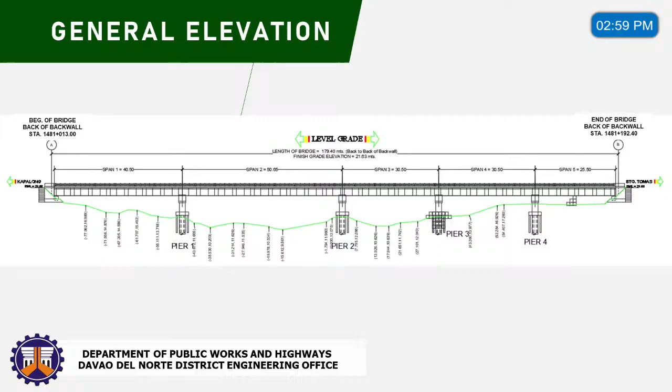To Station 1481 plus 192.4 at Station B. Next slide, please. This is the general plan for the bridge, which has 5 spans. Next slide, please. General elevation of the bridge.

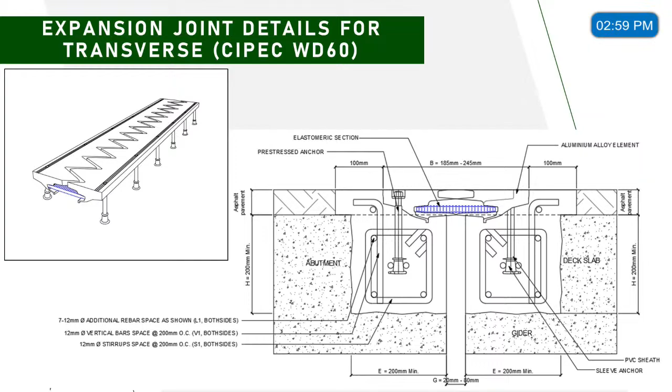So for the replacement of transverse expansion joint, it is located at abutment A and abutment B. As you can see in the geotag photos, these are the damaged expansion joints to be replaced. Next slide, please. For the transverse expansion joint, we will be using finger type expansion joint. These are the details for the expansion joint.

Next. For the replacement of longitudinal expansion joint, the highlighted area is the expansion joint to be replaced. As you can see for the upper part, it was shortened to 41 meters; not the full length of the bridge will be replaced. Next slide, please.

For the longitudinal expansion joint, we will be using compression seal type. This is the details for the expansion joint. The specification is CIPEC WOSD 50. Next slide, please. So these are the longitudinal expansion joints to be replaced. Next slide, please.

Next, the partial deck and slab replacement at span number 3 and span number 4. The highlighted area is the location of the deck slab to be replaced. These are the photos underneath the bridge showing the damaged slab.

Next, the removal and replacement of asphalt overlay for the entire length of the bridge, including approaches. This is the typical section for the asphalt overlay. This is the photo of the bridge deck to be replaced with asphalt.

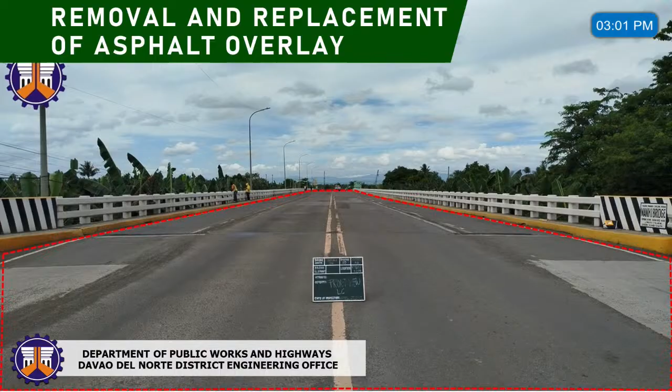Next, application of epoxy injection at Pier 1 and Pier 3. This is the location of the cracks at the pier. As you can see in the geotag photos, the highlighted areas are the cracks to be injected with epoxy.

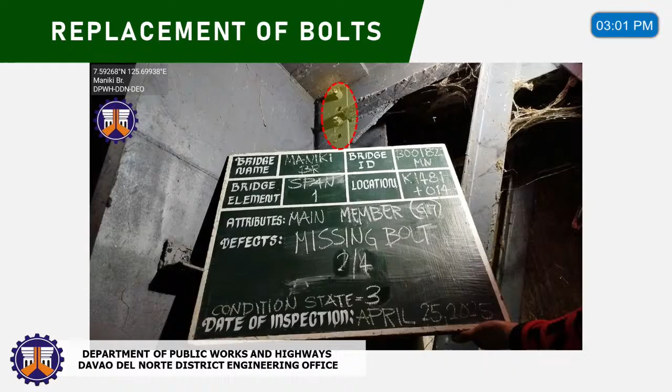Next is the replacement of bolts. These are the photos of the missing bolts underneath the bridge. This is one of the missing bolts, and this is another one.

And that's all for contract ID 26LC0002. Thank you.

Board members, any query regarding the presentation? Query, Mr. Chair, okay.

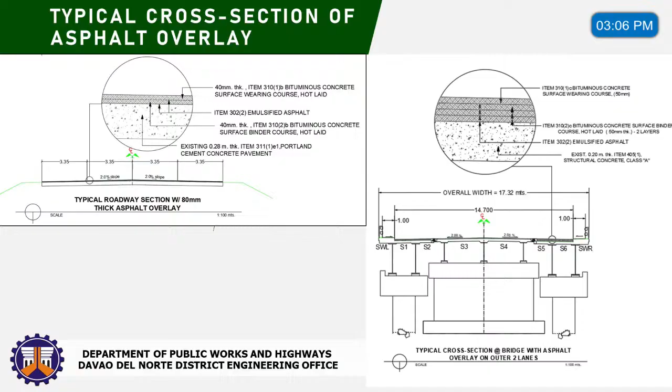Any query regarding the presentation? None, Mr. Chair. The implementing unit? None, Mr. Chair. So thank you, let's proceed to the next project.

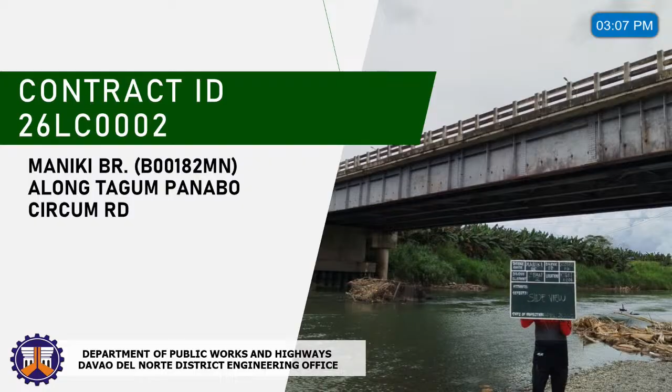Good afternoon, Mr. Chair, good afternoon everyone. For Project Junction, Tagum City Bypass Road, San Agustin-New, Bohol, New Corella, leading to Matin-ao Inland Resort, New Corella, Station 1+091 to Station 1+189, Davao del Norte.

Net length is 98 linear meters. Total width of road is 6.7 meters. Shoulder width is 1.5 meters and thickness of pavement is 230 millimeters.

Scope of works: road concreting, construction of grouted riprap slope protection, application of reflectorized thermoplastic pavement markings, installation of guardrails, and gravel transition ramp.

Summary of quantities, location map, the typical section at normal crown fill section, and geotag photos. End of presentation.

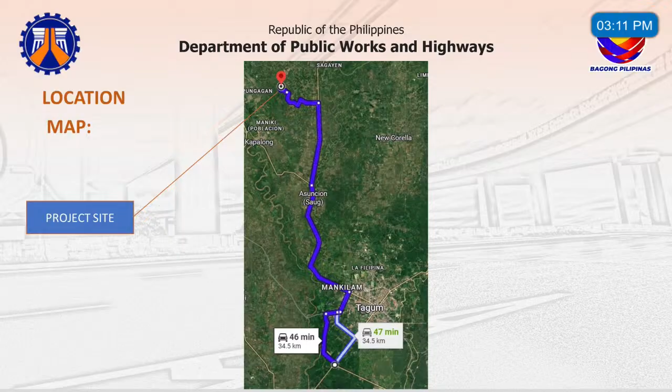Then this is the location of the project site from our office, with a distance of 34.5 kilometers. Geotag photos. As you can see, the trees like banana trees and coconut trees will be removed. Site validation was conducted on September 23, 2025.

Then the site development plan. Then the truss details, we have 50 by 50 by 5 for the main frame and web member, double angle.

Then proof of ownership, sir. Tax declaration pa ang mahatag namo, sir, kay gina-process pa po ang proof of ownership. Then nag-send na po mi og letter for proof of ownership. Na-receive na nila pero wala gyapon sila mo-respond. Nag-wait pa mi sa ilang respond, pero gina-follow up na namo karon.

So minimum equipment requirement, we have backhoe, bar bender, bar cutter, cutting outfit, dump truck, one bagger mixer, plate compactor, boom truck, and welding machine.

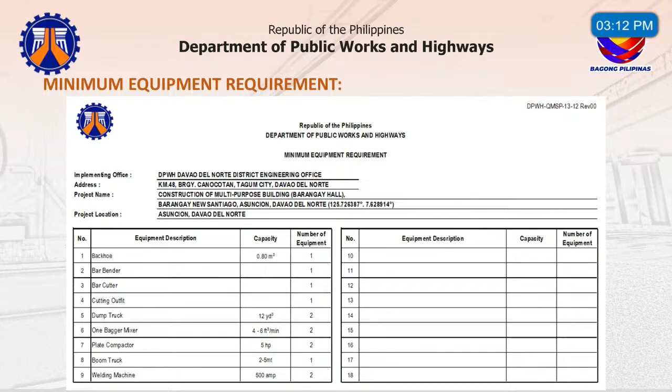Then here are the summary of quantities. For part A, we have field office for the engineer. For part B, we have permits and clearances, project billboard and signboard, occupational safety and health, mobilization and demobilization. For part C, we have earthwork, seedlings and saplings for other programs and initiatives, individual removal of trees, structure excavation, embankment from roadway, structure excavation, and gravel fill.

For part D, we have structural concrete, 3,000 PSI and 4,000 PSI, reinforcing steel deform grade 40 and grade 60, and form works and false works.

For part E, we have soil poisoning as well. For the masonry works, we have CHB 100 mm and 150 mm.

So part E, finishing works, we have wall for 4.5 mm fiber cement on metal frame, wall WPC, carpentry and joinery works for PVC panels, glazed tiles and trims, unglazed tiles, floor finishes, cement plaster finish, and railing. For the painting works, we have masonry and concrete, wood and steel.

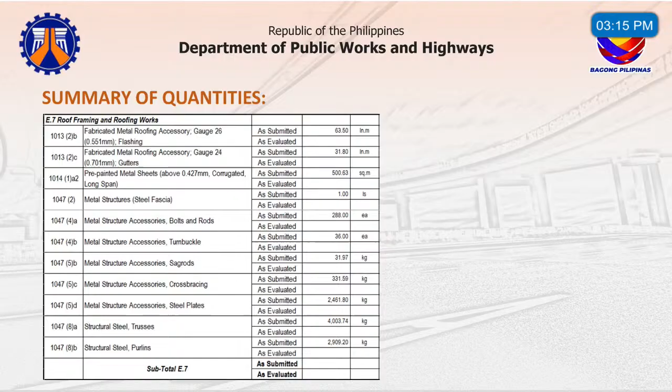So for plumbing, we have sewer line works, storm drainage and downspout, septic vault, plumbing fixtures, and cold water lines. For the electrical works, we have conduits, boxes and fittings, wires and wiring devices, panel board with main and branch breakers, solar panel, and lighting fixtures. And lastly, mechanical works, we have ventilating equipment, air conditioning system, stainless water tank, and fire alarm system.

That's all po, sir, thank you. Thank you. So board members, any query regarding the presentation? Query lang, Mr. Chair. Okay, proceed.

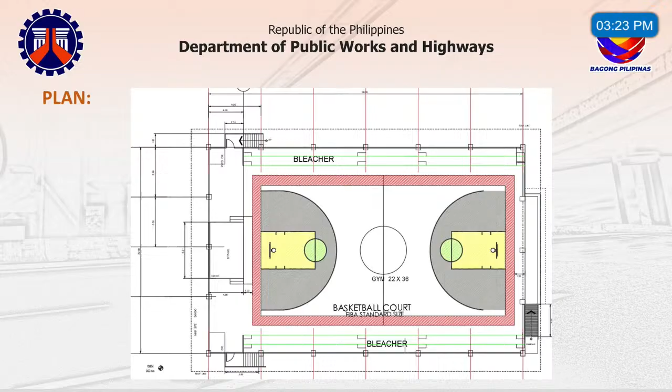This is our perspective, so this is a gym. The building is 36 by 22, so wide flange is what we used for the gym in this project.

As per the site development plan, we have existing structures here: a water tank, tanod post, existing stage, and a daycare center, plus the gym. These mentioned structures will be removed to make way for the gym.

There will also be construction of 35 linear meters of 6.5 meter width concrete road. As you can see, the proposed gym is marked with a red line.

This is our site development plan in 3D. So our gym is here, positioned perpendicular to the main road.

This is our elevation. The elevation is aligned with the main road.

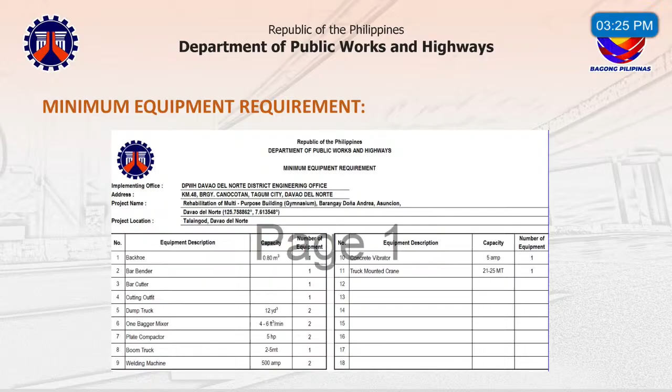This is the minimum equipment requirement.

For the site validation, dated September 23, 2025, you can see it was signed by the Barangay Kagawad.

For the proof of ownership, they have a transfer certificate of title named to Barangay Doña Andrea, Municipality of Asuncion.

For the demolition permit, they have secured the permits for the removal of the existing structures. Here are the demolition permits.

This is the existing site. The gym here will be removed. The blue structure on the left side is the tanod post and water tank, which will also be removed. The stage, though not visible here, is on the right side portion near the gym.

On the right side portion, this will be removed along with the adjacent building, which is the daycare center, which will also be removed.

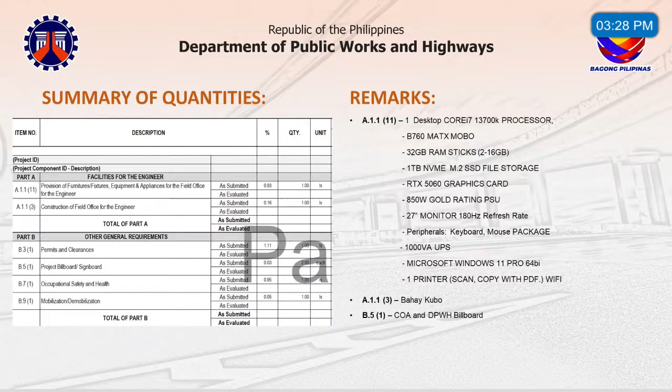For Part B, we have other general requirements: permits and clearances, project billboard and signboard, occupational safety and health, mobilization, demobilization, subgrade preparation for the road, aggregate sub-base course for the road, and removal of existing structures, along with structure excavation and embankment from roadway and borrow, and gravel fill.

For the reinforced concrete, we have structural concrete Class A and B, 4,000 PSI and 3,000 PSI, and reinforced steel grade 40 and grade 60. For the pavement road, we have PCC pavement unreinforced 230mm thick, plus formworks and falseworks. Then for finishing, sanitary, and other civil works, we have CHB non-load bearing.

Non-load bearing CHB 100mm and 150mm. We have carpentry and joinery works, PVC ceiling panels on metal frame. We also have stadium seats, which are plastic seats. Then glazed tiles and trim, unglazed tiles, floor finishes, tactile tiles for the ramp. We also have cement plaster finish, aluminum cladding, railings, then painting works for masonry, wood and steel.

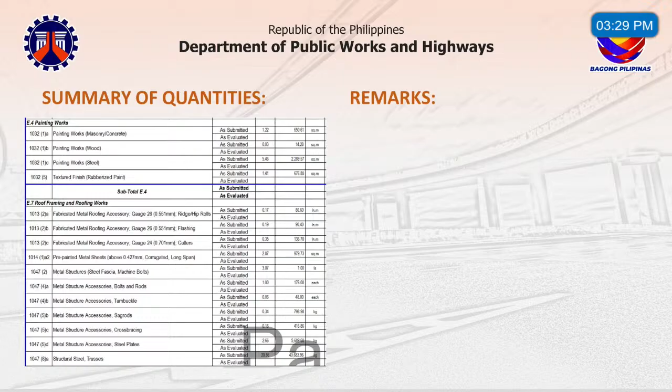The steel used for the wide flange is A36. Then the textured finish is the rubberized paint, so our flooring is rubberized.

For the roof framing and roofing works, we have fabricated metal roofing accessories: ridge, flashing, and gutters. We also have pre-painted metal sheets, corrugated long span, and metal structures, steel fascia and machine bolts, metal structure accessories, bolts and rods, turnbuckle, sag rods, cross bracing, steel plates, and for the structural steel, trusses and purlins.

Also cladding frame. Then for the fabricated materials, we have finishing hardware, hollow steel door, aluminum glass windows, awning type, jalousie windows and frames, which is the door jambs, and doors which are flush and roll-up, steel roll-up door.

For the plumbing sanitary work, we have septic vault, catch basin, sewer line works, storm drainage and downspout, cold water lines, plumbing fixtures. For the electrical works, we have conduit boxes and fittings, wires and wiring devices, panel board with main and branch breakers, and also solar panel with inverter, battery, and other devices and lighting fixtures.

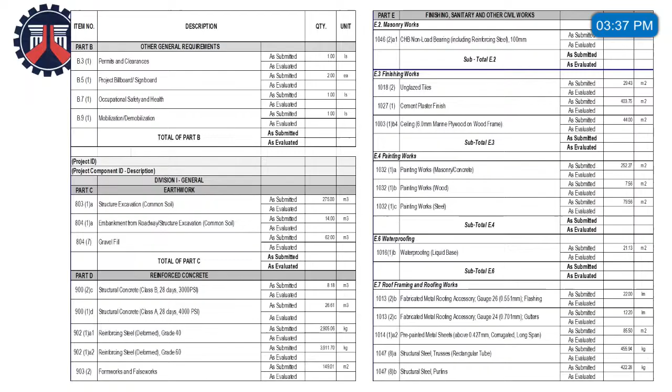Then CHB non-load bearing 100mm. Then unglazed tile, cement plaster finish, ceiling, marine plywood on wood frame. Then painting work for masonry concrete, painting work wood, painting work steel. Then waterproofing liquid base. Then fabricated metal roofing flashing, fabricated metal roofing gutter, pre-painted metal sheet corrugated long span, structural steel trusses, then structural steel purlin. Then frame, jambs, sills, head, transoms and mullion, door wood panel, aluminum glass window sliding type, and aluminum glass window fixed type. So finishing hardware, then storm drainage downspout and plumbing fixtures.

Then for Part E, electrical works: conduit boxes, fitting, then wire and wiring devices, panel board with main branch breakers, solar panel with inverter, battery and other devices, then lighting fixtures, and pole-mounted power transformer with complete accessories. Mechanical work: air conditioning system package split type, water tank, water pumping system, drilling of deep well. Then lastly, water supply, polyethylene plastic pipe HDPE, then valves and water treatment plant modular skid type with complete accessories.

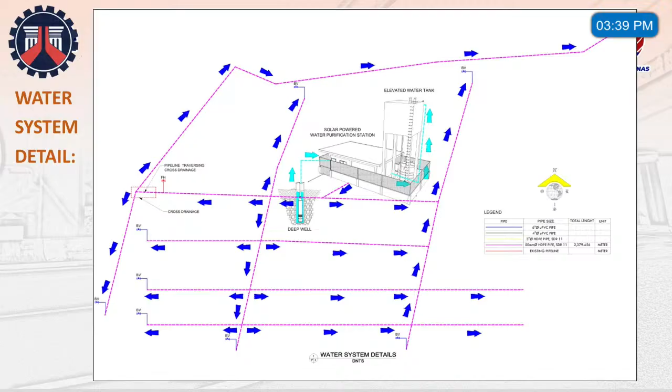Next. So this is the pipeline layout with a total pipeline of 2,379.456 linear meters. Then next, this is the water system detail. And then next, so this is the DO where we adapt the design of water system and filtration, water treatment process. So next, also the water line layout.

Next, and this is our design based on DO 160. So we have a deep well with a 100-meter depth, and also water treatment process. And also we have a 20 cubic meter elevated water tank. Next, this is our pipeline layout.

This is our design for the deep well. It's 100 meters deep. This is based on the geo-resistivity testing conducted on the site.

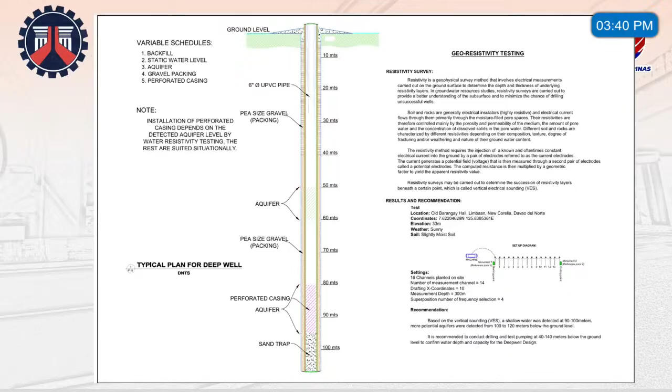So the results, based on the data, we have 14 rods in the testing. The best result is within 6 to 9.

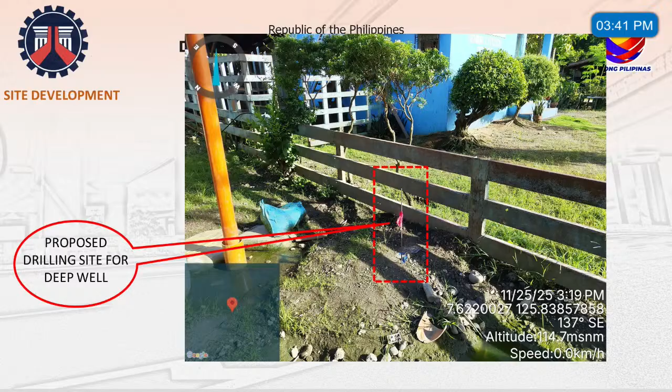These are geotagged photos from the time we conducted the geo-resistivity testing, together with the Second District Planning and Design Section, because they have the geo-resistivity test equipment, so we asked for their help to conduct the testing.

Next, geotagged photos of the site. And this is the proof of ownership, the land title. That's all, sir.

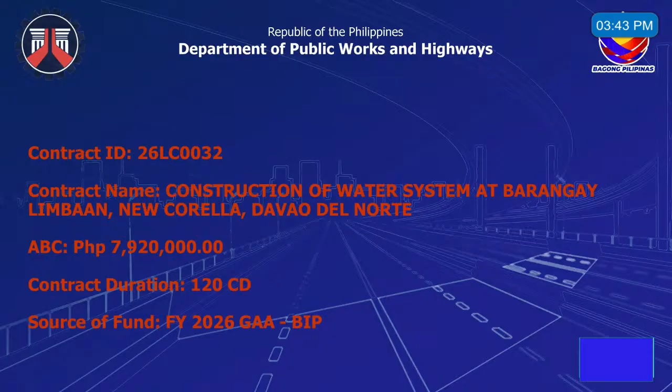This is the project site. Kapalong, on the way to Talaingod. This is the beginning of the project, near Talan-Awon, and the end is at kilometer 1524 plus 500. As you can see in the plan.

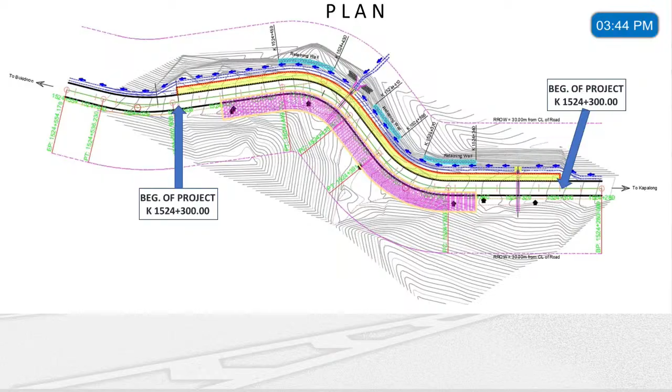Next, the construction of new pavement. Its length is 200 meters, the width is 3.35 meters, then 280 mm thick.

Then construction of canal lining. Its length is also 200 meters, with a transition canal of 10 meters before the beginning and after the end of the project.

Then construction of the MSE wall on the left side, with a length of 140 meters. Other scope of works include removal of existing PCCP, construction of retaining wall, installation of concrete ditch canal with concrete barrier, installation of cross drain with headwall and chute protection, installation of guardrail, GI post with end piece, installation of hazard markers and road signs, and application of reflectorized thermoplastic pavement markings.

Next is the typical roadway section. On the left side is the MSE wall, then on the right side is the concrete canal lining and the new PCCP.

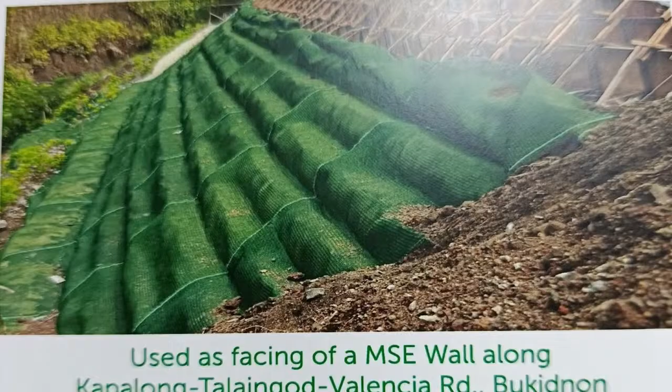Then this is the MSE wall. Next, this is the soil reinforcement and geotextile of the MSE wall. And that's all.

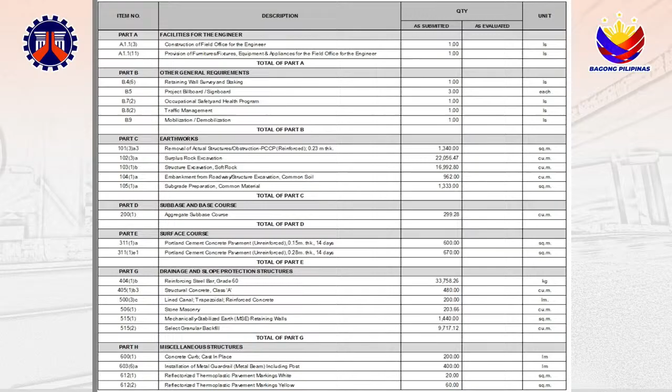Yes, sir. Good afternoon. For Nabunturan-Laak Road, Barangay Santa Fe, Station 6+429.65 to Station 6+505.65, New Corella, Davao del Norte. Next slide, please.

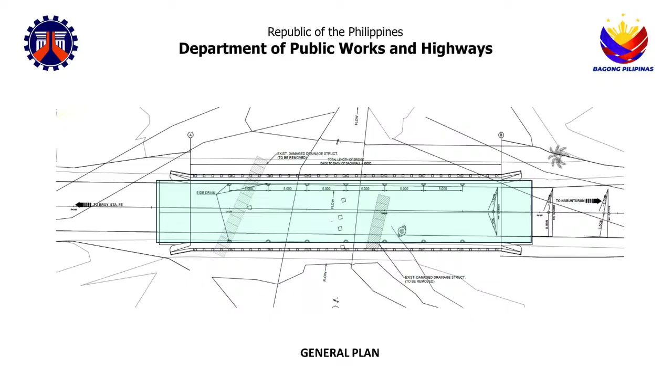Next slide, please. So again, it's a standard bridge. Let me specify the foundation, which is driven piles, 2 rows of 450 by 450 size. So that's the foundation of the bridge.

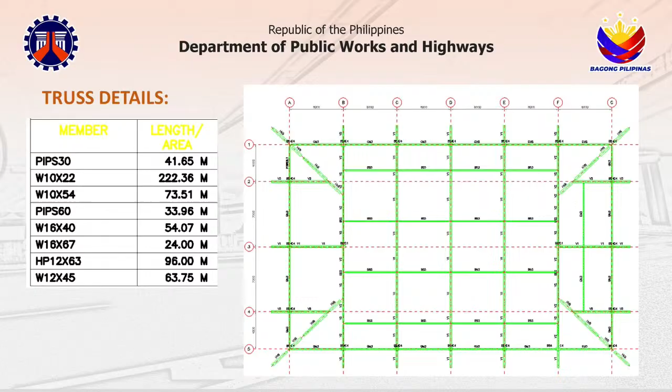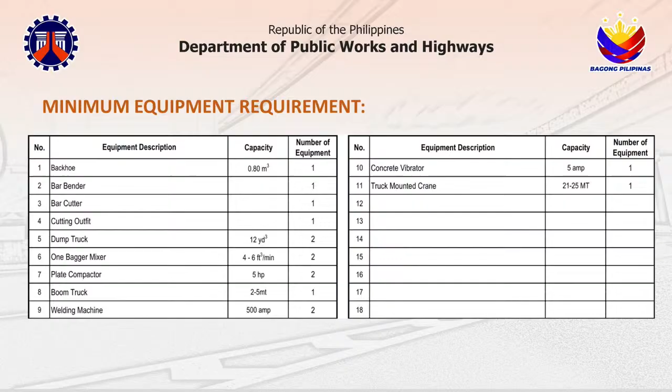This is the minimum equipment requirement: one backhoe, one bar bender, one bar cutter, one cutting outfit, two dump trucks, one bagger mixer, two plate compactors, one boom truck, two welding machines, one concrete vibrator, and one truck-mounted crane.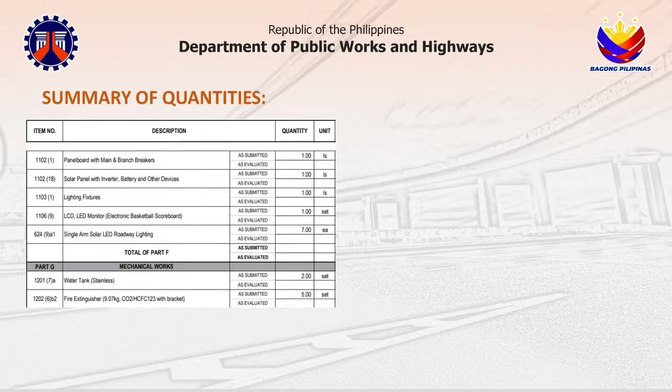We also have finishing hardware, hollow steel door, aluminum glass windows, awning type, jalousie windows, glass, frames such as jambs, sills, head, transoms, and mullions, flush doors, roll-up door, concrete canal, septic vault or tank, catch basin, sewer line works, storm drainage and downspout, cold water lines, and plumbing fixtures. For Part F, electrical works: conduit boxes and fittings, wires and wiring devices, panel board with main and branch breakers, solar panel with inverter, battery, and other devices, lighting fixtures, LCD LED monitor for electronic basketball scoreboard, single arm solar LED roadway lighting, and lastly mechanical works: water tank and fire extinguisher. That concludes my presentation, Mr. Chair.

Thank you. Any query from the board members?

Query, Mr. Chair, about the PCCP. Is it perimeter only? Access road, sir. Access road leading to the site itself. The length is 40 meters, 40 linear meters.

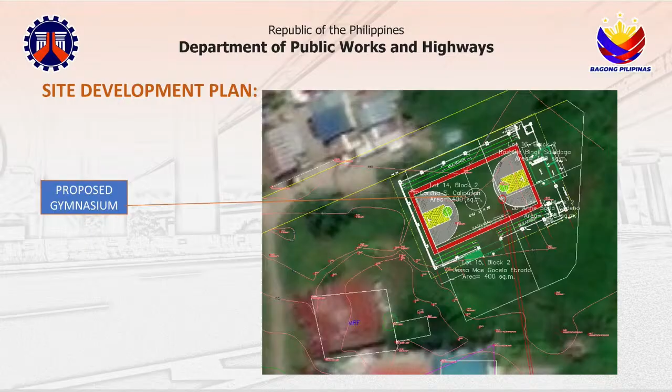How about the elevation of the gym, the floor elevation? Considering, is this a flooded area or is it okay? Please check your cross section. Can you see it? I can't see it.

Based on the site condition, it's a swampy area. But how about during rainy season, is it a flooded area? The elevation—we also considered that. We must elevate it, Mr. Chair.

So how many meters from the original ground? 1.8 meters. Wow, 1.8? Are you sure that's high enough? Yes, Mr. Chair. The elevation of the gym—from the original ground, is it 1.8 meters? Yes, it's included.

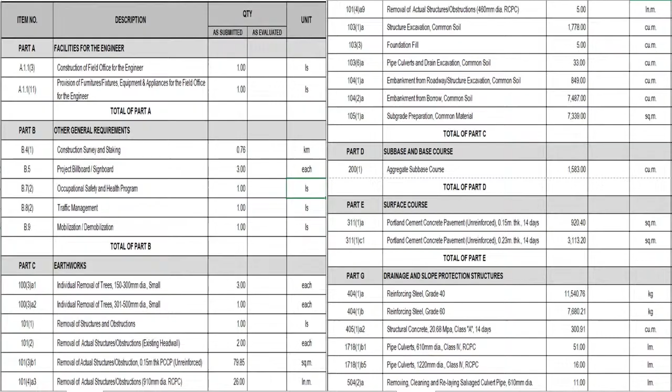Then removing, cleaning, relaying, salvage culvert pipe, 610 mm diameter. Then stone masonry, concrete slope protection. For the miscellaneous structures: warning sign 600 mm W25B, intersection and junction signs Y-junction, guide or information signs G41 fingerboard direction signs, hazard markers 150 by 600 mm chevron signs.

Seedlings or saplings for other programs or initiatives. Reflectorized thermoplastic pavement markings, white and yellow. And single-arm solar LED roadway lighting, 8-meter pole, 80 watts to 125 watts, 6 pieces. Next, for the typical roadway section.

The width of the PCCP is 3.05 meters. Then the concrete pavement shoulder is 1.5 meters. Then these are the details of the slope protection. These are the geotag photos showing the beginning of the project.

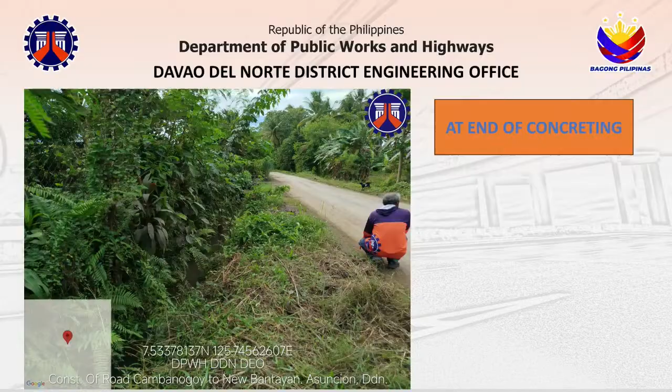That's all. Okay, thank you. Any query from the board members?

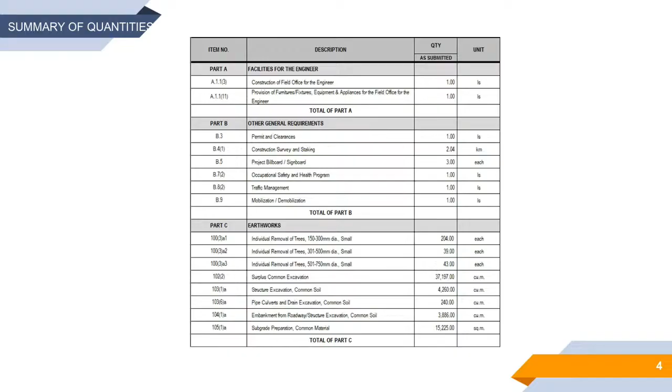Then for the sub-base and base course: aggregate sub-base course. For the surface course: gravel surface course, Portland cement concrete pavement unreinforced, 0.23 meters thick, 14 days. For the drainage and slope protection structures: line canal, trapezoidal, reinforced concrete.

Pipe culverts, 910 mm diameter, class 4 RCPC. Pipe culverts, 1,220 mm diameter, class 4 RCPC. Grouted riprap, class A, stone masonry, hand-laid rock embankment.

And then for the miscellaneous structures: metal guardrail, metal beam including post, single W beam, metal beam end piece bull nose, warning signs 600 mm, W13A horizontal alignment curve left or right, W14A horizontal alignment reverse curve left or right, W15A horizontal alignment winding road left or right, W54B road obstacle sign steep descent, and W55B road obstacle sign steep climb.

Then seedlings or saplings for other programs or initiatives. Then reflectorized thermoplastic pavement markings white and reflectorized thermoplastic pavement markings yellow.

Then this is the plan for the project. Then this is the typical roadway section. 3.05 meters is the width of the project. Then 1.5 meters is the shoulder.

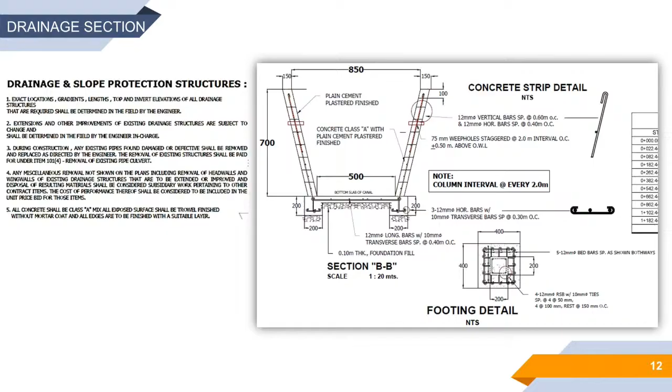Then this is the typical roadway section sa massive cut. Then this is the concrete line canal trapezoidal details. Then this is the grouted riprap slope protection detail. Then this is the detail for guardrails. Then these are the geotag photos.

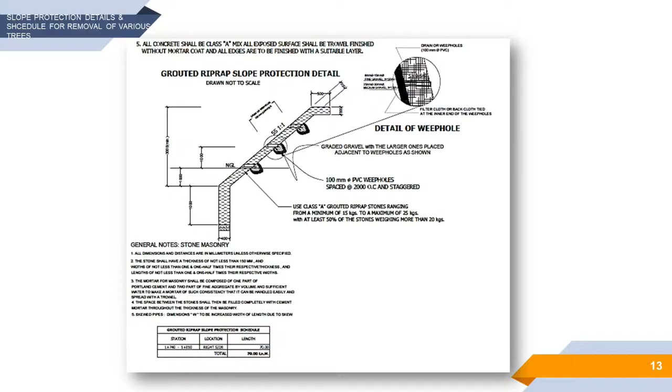Good afternoon, Mr. Chair, good afternoon everyone. The requirements of bidding documents, including invitation to bid, instruction to bidders, bid data sheet, general conditions of contracts, special conditions of contracts, specifications, drawings, bill of quantities, and Philippine bidding documents related forms. The bidding documents are posted on the DPWH website and PhilGEPS.

Amendments in the provision of the bidding documents shall be issued through a supplemental bid bulletin and will be posted in the bid bulletin and notices. Documents to be submitted by the bidder: technical and financial proposals.

Bids must be duly received by the procuring entity's BAC at Kilometer 48, Barangay Canocotan, Tagum City, Davao del Norte, for manual submission, or at electronic bids_DavaodelNorte@dpwh.gov.ph for electronic submission. Bidders should only select one mode of submission, either manual or electronic. For electronic submission, prior to the deadline of submission of bids, the prospective bidder shall send an email attaching the copy of the official receipt of purchase of bidding documents in portable document file or PDF format.

Only the electronic bids of bidders who have successfully submitted an electronic official receipt shall be accepted. Prospective bidders shall prepare their bids in 2 file folders in appropriate documents and file format, each for the technical and financial components. Only during the actual opening of bids shall the bidder disclose the passwords for his electronic bid.

This can be done by the bidder's authorized representative verbally in person, through phone call, online platforms, or through writing. For joint venture, the format of PCAB ID to be used by the bidder in naming their files shall be the PCAB ID of the lead member.

The step-by-step detailed procedure of electronic submission is stipulated in the bidding documents clause 22 and in the Department Order 87 series of 2020. Also included in the Department Order are the steps for the modification of electronic bid, non-participation in the bidding, withdrawal of electronic bid, and proper email subject and the file name for each file to be submitted to designated email address.

For the technical proposal: PhilGEPS Certificate of Registration, Platinum Membership in accordance with Section 20 of the IRR, PCAB license and registration in case of joint venture. Statement of all its ongoing government and private contracts, including contracts awarded but not yet started, if any, whether similar or not similar in nature and complexity to the contract to be bid.

Statement of the bidder's single largest completed contract or SLCC in accordance with ITB Clause 5-5. The SLCC shall be supported by an owner's certificate of final acceptance issued by the project owner other than the contractor, or a final rating of at least satisfactory in the CPES or a similar performance and monitoring system. In case of contracts with the private sector, an equivalent document shall be submitted.

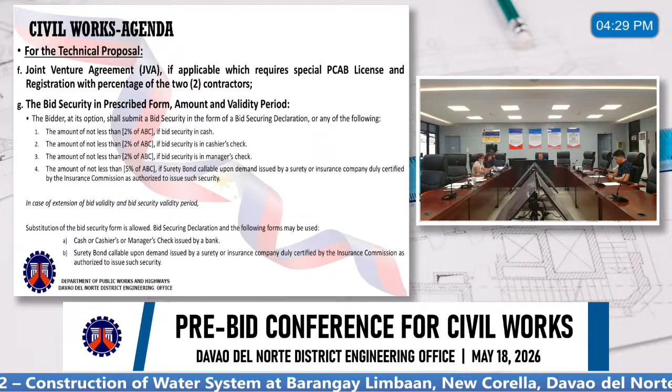The bidder at its option shall submit a bid security in the form of a bid securing declaration or any of the following: the amount of not less than 2% of ABC if bid security is in cash, the amount of not less than 2% of ABC if bid security is in cashier's check, the amount of not less than 2% of ABC if bid security is in manager's check, and the amount of not less than 5% of ABC if surety bond. In case of extension of bid validity and bid security validity period, substitution of the bid security form is allowed.

Bid securing declaration and the following forms may be used: cash or cashier's or manager's check issued by a bank, surety bond callable upon demand issued by a surety or insurance company duly certified by the Insurance Commission as authorized to issue such security.

Bid shall remain valid for the period specified in the BDS, which shall not exceed 120 calendar days from the date of the opening of bids. Should it become necessary to extend the validity of the bids and the bid securities beyond 120 calendar days, the procuring entity concerned shall request in writing all those who submitted bids for such extension before the expiration date therefore. Any discrepancy in the amount, even a centavo, means non-compliant.

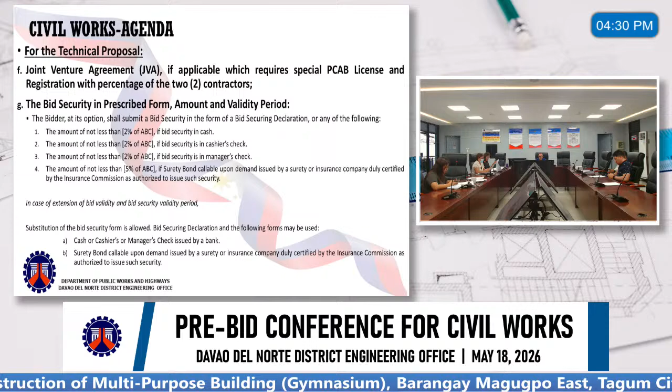Project requirements shall include the following: organizational chart of the personnel to be deployed for the procurement project to be bid, list of contractors' personnel, example, project manager, project engineers, materials engineers, and foremen, to be assigned to the procurement project to be bid, with their complete qualifications and experience data. This personnel must meet the required minimum years of experience set in the BDS.

As per Department Order Number 9, Series of 2012, if a proposed key technical personnel is an employee of the bidder and working on another project at the time of the bidding, the bidder shall submit a certification that the personnel will be pulled out from the ongoing project once the bidder is awarded the contract, and he or she will be replaced with another person with equal or better qualifications as certified by the head of the implementing office.

The bidder may propose a key technical personnel who is not its employee, provided that the said personnel is required to submit a certification that he or she will work for the bidder if it is awarded the contract under bidding. The said certification shall be included in the first envelope of the sealed bid.

As per Department Order Number 252, Series of 2025, issued by the Department of Labor and Employment, revised implementing rules and regulation of Republic Act Number 11058, entitled An Act Strengthening Compliance with Occupational Safety and Health Standards and Providing Penalties for Violations thereof. Under Section 10, Safety in the Use of Equipment: operators shall undergo appropriate training and certification from TESDA, the Professional Regulation Commission, or other relevant government agencies before using the equipment. The DOLE may recognize training provided by equipment manufacturers, suppliers, or international organizations if it is not available locally.

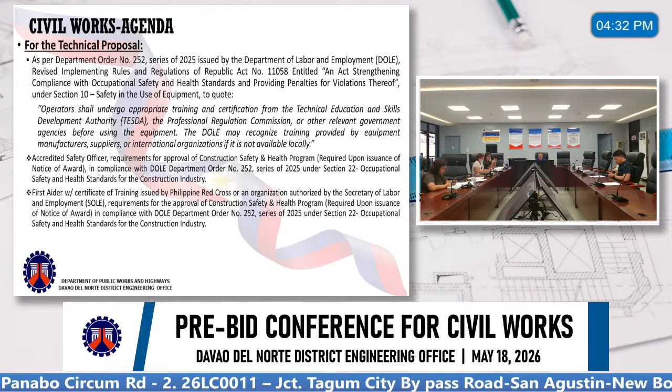Accredited Safety Officer requirements for approval of Construction Safety and Health Program, required upon issuance of notice of award, in compliance with DOLE Department Order Number 252, Series of 2025, under Section 22, Occupational Safety and Health Standards for the Construction Industry. First aider with certificate of training issued by Philippine Red Cross or an organization authorized by the Secretary of Labor and Employment.

Requirements for the approval of Construction Safety and Health Program, required upon issuance of notice of award, in compliance with DOLE Department Order Number 252, Series of 2025, under Section 22, Occupational Safety and Health Standards for the Construction Industry.

In compliance with Section 17 of DOLE Department Order Number 13, the implementation of construction safety shall be considered in all stages of project procurement, design, estimate, and construction, and its cost shall be integrated into the overall project cost under pay items B-71 and B-72, Occupational Safety and Health, as a lump sum amount to be quantified in the detailed estimate.

The list of contractor's major equipment units which are owned, leased, or under purchase agreement, supported by proof of ownership or certification of availability of equipment from the equipment lessor or vendor for the duration of the project, as the case may be, which must meet the minimum requirements for the contract set in the BDS.

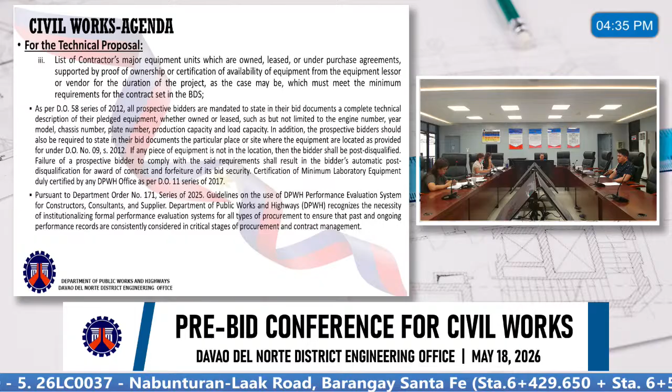Pursuant to Department Order Number 171, Series of 2025, guidelines on the use of the DPWH performance evaluation system for constructors, consultants, and suppliers. The Department of Public Works and Highways recognizes the necessity of institutionalizing a formal performance evaluation system for all types of procurement, to ensure that past and ongoing performance records are consistently considered in critical stages of procurement and contract management.

At the eligibility stage, pursuant to Section 54-4-2-5 of the IRR for infrastructure projects, bidders shall submit proof of satisfactory past performance, such as CPES rating of at least satisfactory, or an owner's certificate of final acceptance or equivalent for private sector contracts.

Bidders must ensure adherence to Department Order 110, Series of 2024, for the implementation of ISO 9001:2015 certification requirements for large A, medium B, and medium A contractors in the procurement of infrastructure projects of the department. Hence, bidders must attach to the technical envelope their ISO 9001:2015 certification. Failure to attach will result in disqualification of their bid.

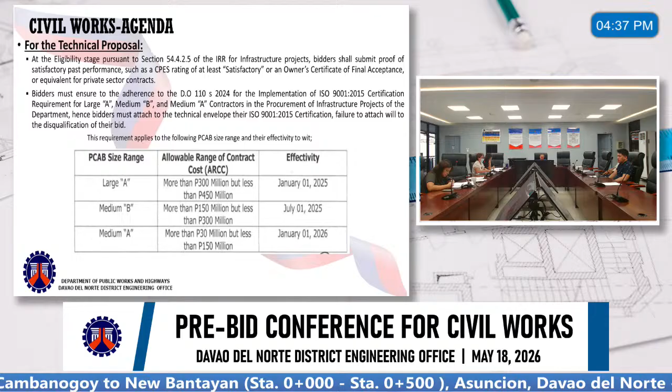Pursuant to Department Order Number 169, Series of 2025, only accredited project engineers may be assigned to DPWH projects, subject to the following limits of assignment. The Omnibus Sworn Statement, in accordance with Section 54-3 of the IRR, 11 items.

To ensure compliance with the memorandum dated February 24, 2026, subject: clarification and implementing of beneficial ownership information, or BOI, disclosure requirements under the memorandum dated November 19, 2025, in accordance with Section 82 of the Implementing Rules and Regulation of Republic Act Number 12009, which provides for the disclosure of beneficial ownership information for legal entities participating in government procurement. In this regard, and consistent with the intent of said provision, the following implementation guidance is adopted.

Considering that the current omnibus statement already incorporates a sworn declaration relating to beneficial ownership disclosure, and in order to streamline documentary requirements and avoid duplication of sworn submissions, the separate submission of the sworn affidavit of eligibility and beneficial ownership, Annex A, shall no longer be required. In lieu thereof...

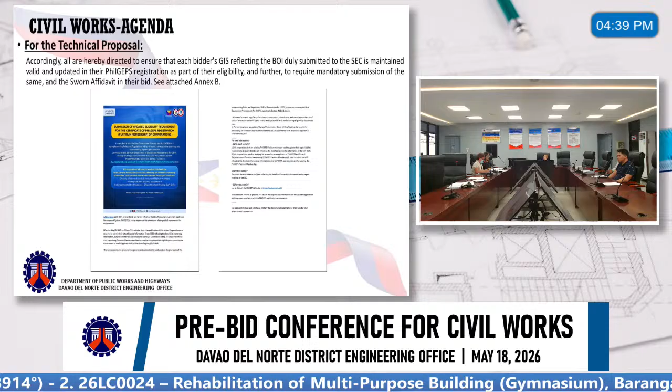All documents to be submitted must be current and updated, otherwise it will be rated as failed. Bidders shall enclose their technical documents in one sealed envelope marked technical component, and the financial component in another sealed envelope marked financial component, sealing them all in an outer envelope marked bid. The bid proposal must be in A4 size.

Further, the authorized liaison officer will be the one to drop the bids. Bids submitted through carrier will not be accepted.

Bidders shall submit 2 original copies and 1 copy of certified true copies of the technical and financial components of the bid. The original copy of the bid shall be typed or written in ink, limited to 2 decimal places in amount, and shall be signed by the bidder or its duly authorized representative.

All envelopes shall contain the name of the contract to be bid in capital letters, bear the name and address of the bidder in capital letters, be addressed to the procuring entity's BAC in accordance with ITB Clause 18-1, bear the specific identification of this bidding process indicated in ITB Clause 1-1, and bear a warning: do not open before the date and time for the opening of bids, in accordance with ITB Clause 19.

Bidders are also advised to be responsible for their bids submitted in accordance with the checklist, and their technical and financial proposals should have proper tabbing in words based on the order in the checklist, including proper sequencing of documents in chronological order.

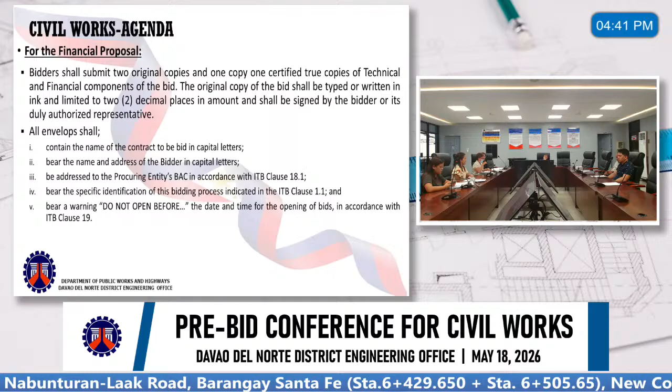Further, bidders are advised not to recycle legal documents or documents attached in previous bid submissions which have the signature and countersigns of the BAC members. Late bids submitted will not be accepted.

All forms as mentioned in ITB Clause 17-1 must be completed without any alterations to their format. No substitute form shall be accepted.

Each and every page of the bid form, including the bill of quantities under Section 9 hereof, shall be signed by the duly authorized representative of the bidder. Failure to do so shall be ground for the rejection of the bid.

Any insertions, erasures, or overwriting shall be valid only if they are signed or initialed by the duly authorized representative of the bidder. Bidders with the lowest bid during the opening of bid are not guaranteed to be awarded the contract.

All bid documents are still subject to detailed bid evaluation and post-qualification prior to being declared as the lowest calculated responsive bid and subsequently awarded the contract. The bidders are given 3 days after the bidding to file a motion for reconsideration.

Criteria and procedure for eligibility check, preliminary examination of bids, detailed evaluation of bids, post-qualification, deliberation, recommending award, and award.

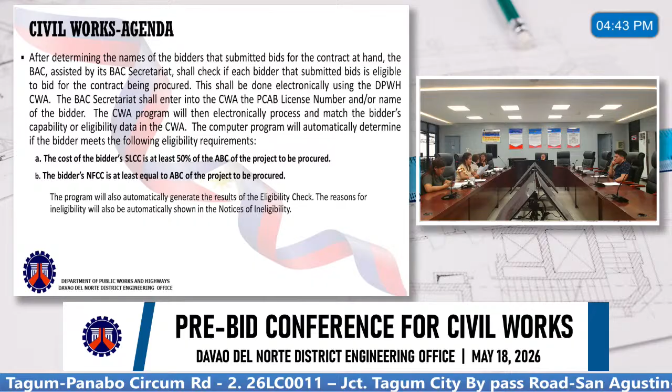The program will also automatically generate the results of the eligibility check. The reasons for ineligibility will also be automatically shown in the notices of ineligibility.

Bidding will be conducted through competitive bidding procedures using a non-discretionary pass-fail criterion as specified in the IRR, otherwise known as the New Government Procurement Act, or NGPA.

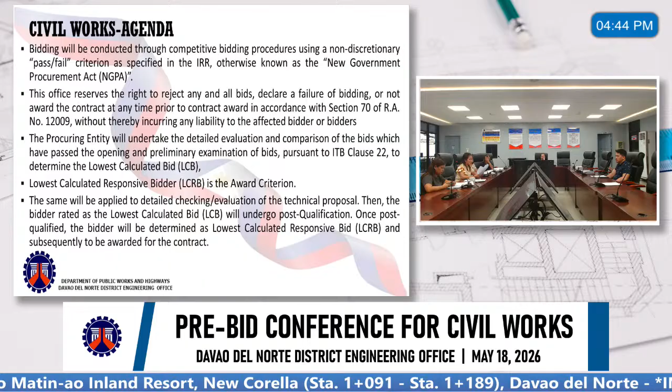This office reserves the right to reject any and all bids, declare a failure of bidding, or not award a contract at any time prior to contract award, in accordance with Section 70 of RA Number 12009, without thereby incurring any liability to the affected bidder or bidders.

The procuring entity will undertake the detailed evaluation and comparison of the bids which have passed the opening and preliminary examination of bids pursuant to ITB Clause 22 to determine the lowest calculated bid or LCB. Lowest calculated responsive bidder is the award criterion.

The same will be applied to detailed checking and evaluation of the technical proposal. Then the bidder rated as the lowest calculated bid will undergo post-qualification. Once post-qualified, the bidder will be determined as lowest calculated responsive bid and subsequently awarded the contract.

All bidders found to have conflicting interest shall be disqualified to participate in the procurement at hand, without prejudice to the imposition of appropriate administrative, civil, and criminal sanctions.

All prospective bidders shall be required to submit a sworn disclosure of relations and beneficial ownership, clearly identifying the natural persons who ultimately own, control, or benefit from the bidding entity, whether directly or indirectly, through shareholding, voting rights, contractual agreements, or other means of control.

Failure to comply shall be a ground for the automatic disqualification of the bid in consonance with Section 59 of the IRR. For the post-qualification, the bidders were advised to read Department Order Number 127 Series of 2018 and other issuances relative to this matter, since the BAC will be very keen and strict on the conduct of post-qualification process.

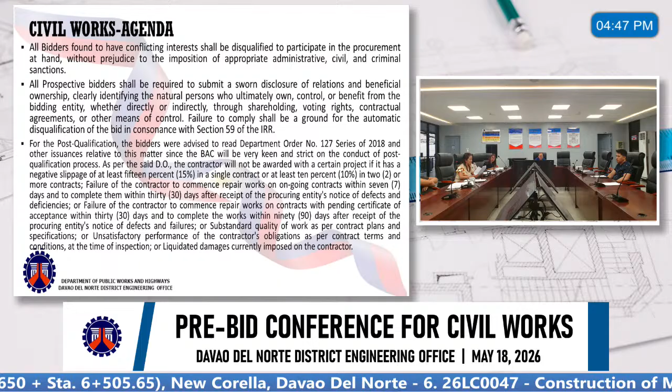Moreover, the qualifications and experience of the key technical personnel is subject for verification as part of the post-qualification process as per DO number 127 series of 2018.

The BAC, with the assistance of the equipment verification team, will be strict on the compliance of the equipment as part of post-qualification as per DO number 127 series of 2018. The equipment verification team will conduct an inspection on the verification of the equipment pledged by the contractor.

That's all, Mr. Chair.

Okay, thank you. Questions? Mr. Chair, okay, so we would like to inform our bidders, Mr. Chair, that there are common reasons for bidders' failure. Please allow me, Mr. Chair.

Number 1 is failure to follow the posted supplemental bulletin on PhilGEPS and DPWH website. A contractor may fail in the bidding process if he or she does not strictly comply with the requirements, revisions, or clarifications stated in the supplemental bulletin posted on the PhilGEPS and DPWH website.

Incorrect pay item, description, unit, or quantity in the bill of quantities. Errors in the bill of quantities such as incorrect pay items, descriptions, units of measurement, or quantities may result in disqualification during the evaluation of bids.

Inconsistencies in the equipment pledge and supporting documents. The contractor may be disqualified if the equipment listed in the equipment pledge does not match the attached supporting documents such as official receipt, certificate of registration, proof of ownership, or lease agreement. All details, example equipment type, plate number, capacity, and ownership information, must be consistent and properly documented.

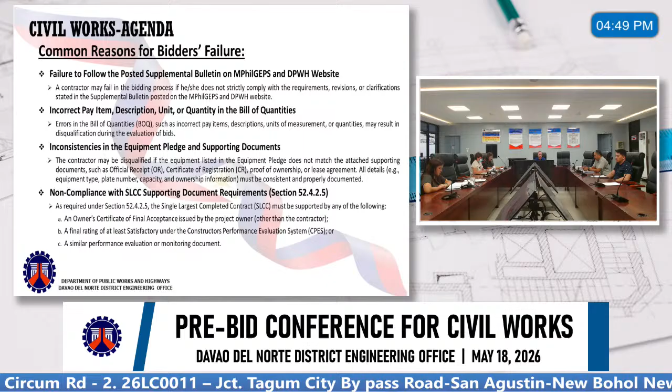Non-compliance with SLCC supporting documents requirements, Section 52-4-2-5. As required under Section 52-4-2-5, the SLCC or single largest completed contract must be supported by any of the following: an owner certificate of final acceptance issued by the project owner other than the contractor, a final rating of at least satisfactory under the Constructor's Performance Evaluation System or CPES, or a similar performance evaluation or monitoring document. For contracts with the private sector, an equivalent supporting document must be submitted. Failure to provide the required documents may result in disqualification.

Alteration or substitution of prescribed bidding forms, Section 9 of the Philippine Bidding Documents Related Forms, ITB Clause 17-1. The forms required under ITB Clause 17-1 must be completed strictly in accordance with their prescribed format. No alterations, modifications, or substitutions of the official forms shall be accepted. Any deviation from the required format may lead to rejection of the bid.

For corporation and partnership, failure to attach the GIS reflecting the BOI duly received by the SEC and sworn affidavit in your bid as part of your eligibility, in compliance with Section 82 of the IRR of RA 12009 on the declaration of beneficial ownership, shall also be ground for disqualification.

Failure to specify the applicable taxes itemized in the detailed estimate using the prescribed bid form, particularly under Declaration E, shall be a ground for disqualification. This is in accordance with the Instructions to Bidders ITB Clause 17-2 and as provided under Section 9 of the Philippine Bidding Documents. The forms referred to in ITB Clause 17-1 must be duly accomplished and submitted without any alteration to their prescribed format. That's all, Mr. Chair.

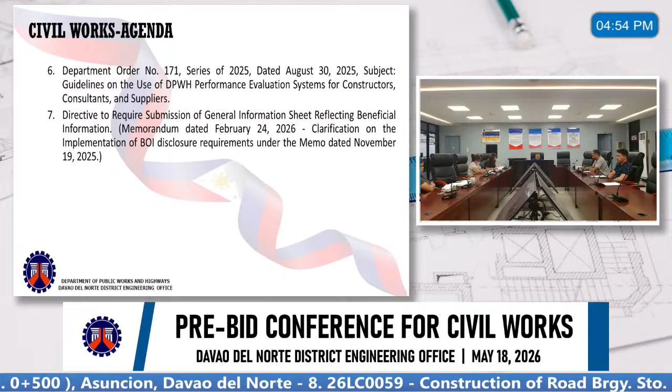Also, bidders are reminded that their bid documents must follow the completeness and sufficiency of the bid. The discounts offered should be clearly and legibly written with signatures so the BAC will be able to read them during the opening of bids.

If there are any changes in the basic contract data of these projects, kindly closely check and monitor the DPWH and PhilGEPS websites for information and guidance regarding bid bulletins, amendments to the bidding documents of these projects, and all other notices such as postponement or re-advertisement. That's all, Mr. Chair. Thank you.

Are there any other matters for discussion? How about our schedule tomorrow? Opening of bids. Good afternoon, Mr. Chair. There will be a scheduled opening of bids for tomorrow, May 19, 2026. How many? 10 contracts, Mr. Chair. 10. Okay, thank you.

So, other matters for discussion? The summary: in summary, the following matters were discussed and noted.